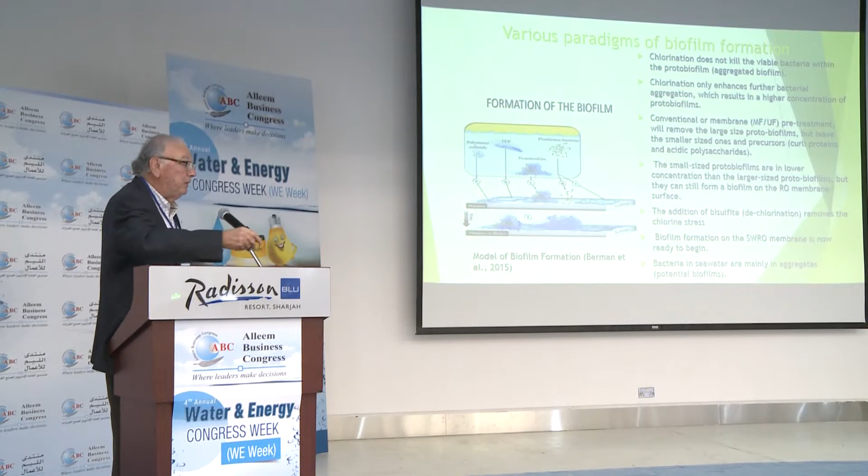The formation of the biofilm actually has various paradigms, okay, how it forms, but basically the biofilm develops. People think that if you take seawater and you chlorinate it, that will solve the biofouling problem. But actually, we found that chlorination does not kill the bacteria. It just induces them into a resistant state and causes the bacteria to aggregate, which enhances the ability of the bacteria in these aggregates to stick to a membrane.

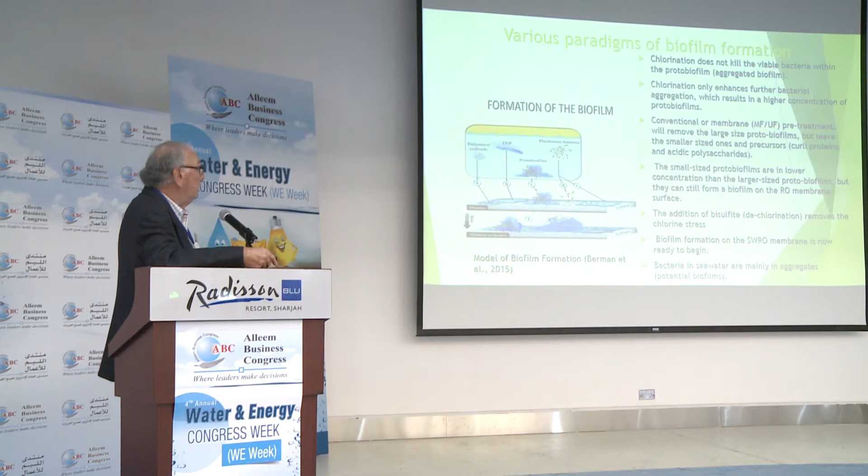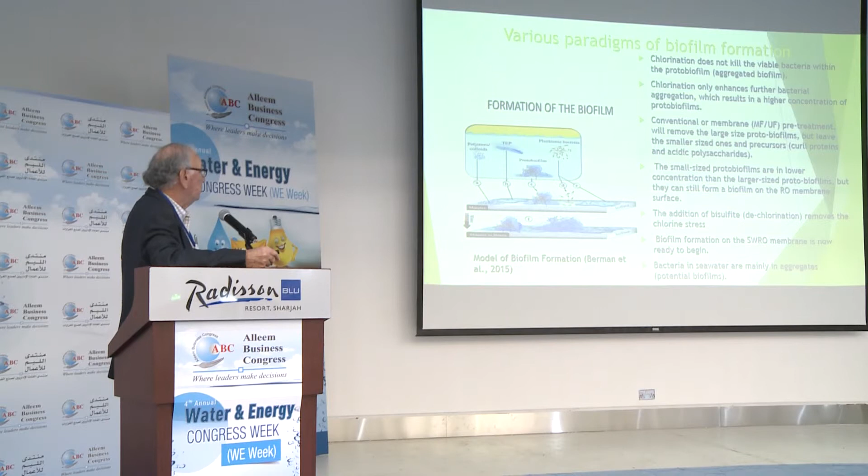If you do pre-treatment in reverse osmosis, either MF, microfiltration, or UF, ultrafiltration, you will remove the large, what are called protobiofilms that are present, but the smaller precursors to these protobiofilms will get through MF and UF. So right now, there is no pre-treatment, at least we know of, that will remove these precursors to these protobiofilms.

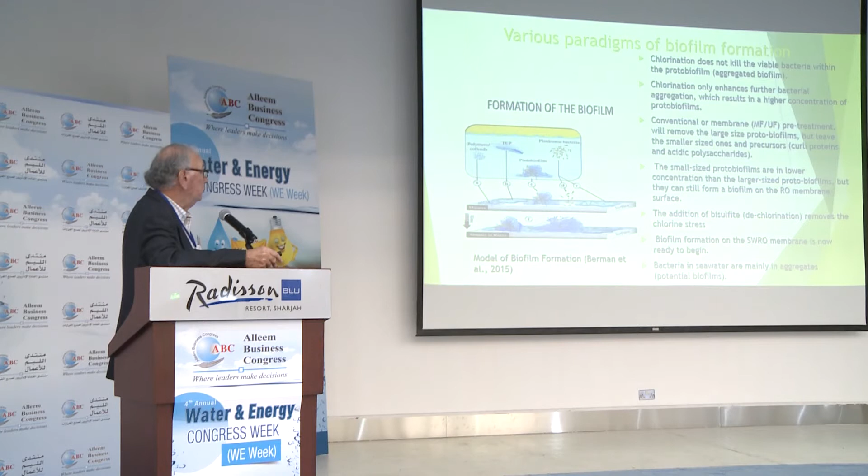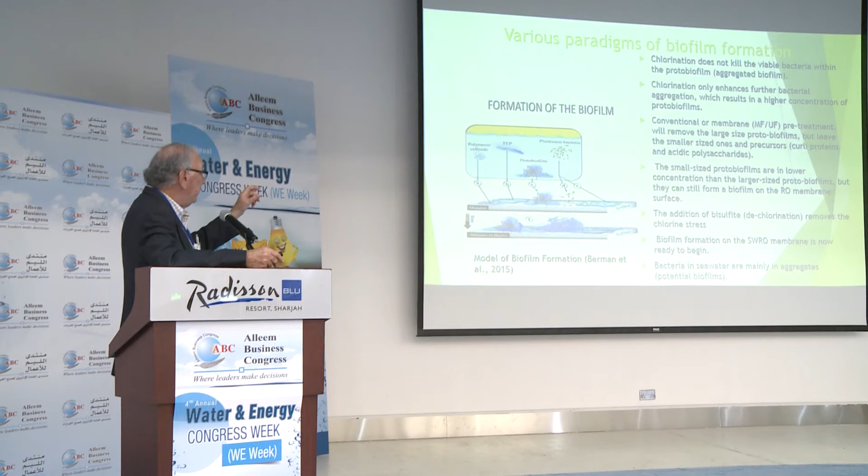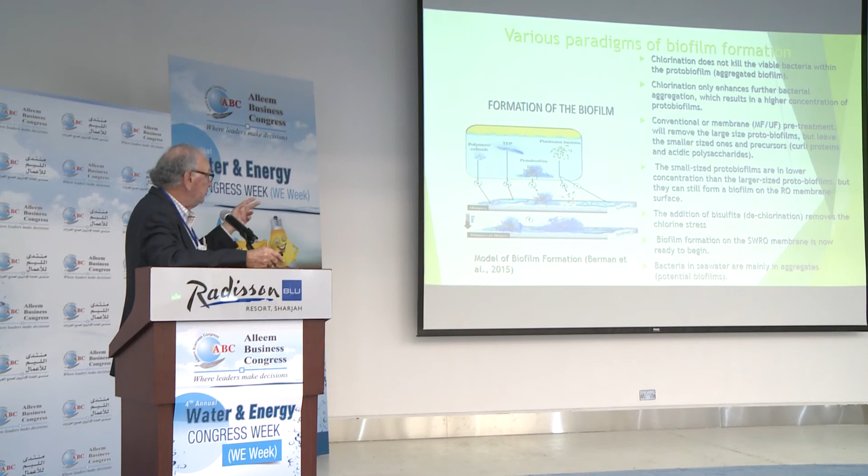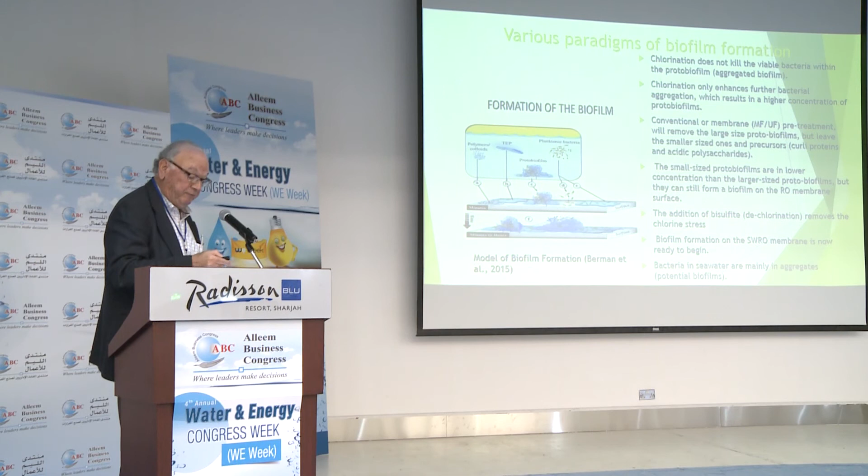In seawater, bacteria do not exist as single bacteria, but are in this aggregated state, which are called protobiofilms. When you do pre-treatment, you can remove these protobiofilms, but the precursors, which are present in the seawater and in wastewater, will get through the pre-treatment and go to the RO membrane, where they can reform into protobiofilms on the membrane surface.